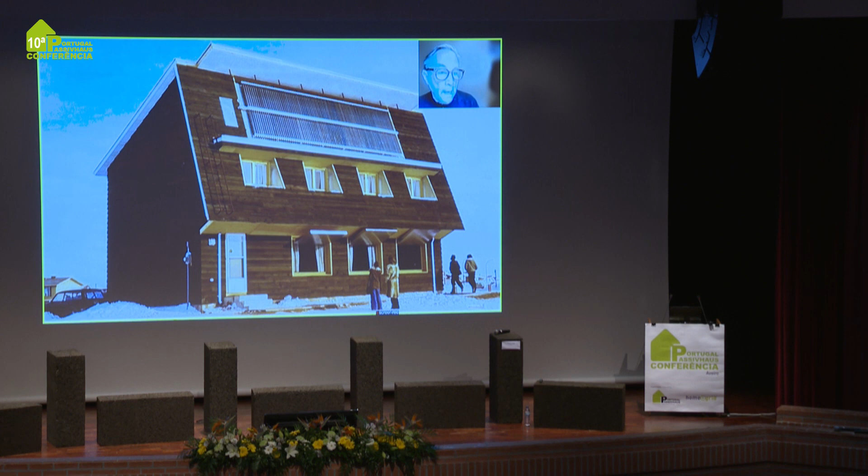This was an era when we were first thinking about super insulation, and this house in Saskatchewan in 1974 became an inspiration for Passivhaus. In some places, it was the beginning of the bicycle revolution. Not in the United States, where they basically started tightening car regulations and car fuel consumption, the beginning of tighter building codes and reducing demand for fuel.

Then supply-sider Ronald Reagan came along, smiled, cut a deal with the Saudis, and everybody started pumping again, and life was fine. Fracking made the energy problem better, but it made the carbon problem worse.

Energy conservation and efficiency became a hard sell when you had all kinds of new sources of gas, from the oil sands to the North Sea to deep sea drilling to Alaska pipelines. It was all about supply. And we kept burning more gas and oil, and the temperature kept rising.

Solving the energy problem didn't do anything for the carbon problem. Global warming was common knowledge and accepted, but everybody was having such a good time burning all that oil and gas and didn't take it very seriously. And of course, it was all very political.

The Paris Agreement, after years of talk, finally set some limits on carbon emissions with a schedule, a carbon budget, and a target, a limit on warming to avoid catastrophe.

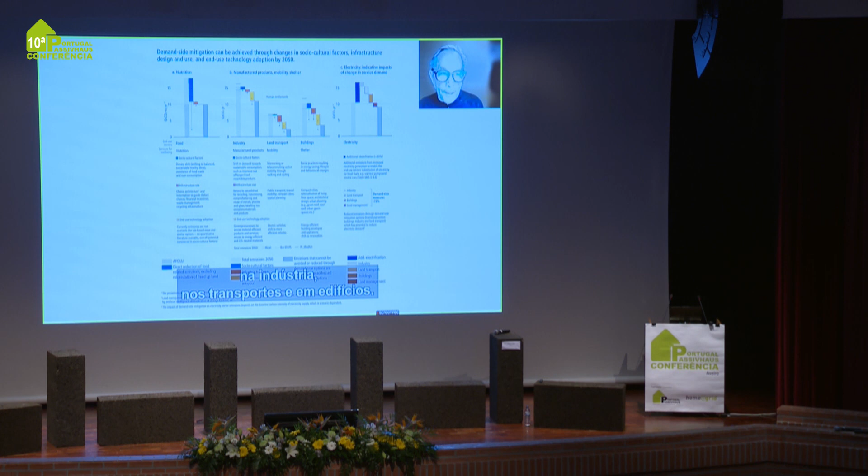They went so far as to say that demand-side mitigation, changes in infrastructure, technology, and behavior could reduce global greenhouse gas emissions by 40 to 70% by 2050. As Amy Westervelt, a journalist, wrote it, the report made one thing abundantly clear: the technologies and the policies necessary to adequately address climate change exist, and the only real obstacles are politics and fossil fuel interests.

So everybody keeps showing these graphs, we have to drop by the graph, these slopes of changes that have to be made. But in fact, it's much simpler than that. There's a ceiling, a budget, a number that they determined through their calculations, with what percentage do we have to stay under a certain temperature.

So from 1850 until now, we've added 2,390 gigatons of CO2, and this is what we have left to stay under 1.5 degrees at a 50% chance: 500. For 2 degrees: 1,350. If we want bigger chances, it's a smaller number.

And here we are again. The last time the tanks were rolling through the desert, now they're rolling through the streets of Ukraine. And we've got a gas crisis. They spent all this money to build this big pipe from Russia to Germany, and then they blew it up.

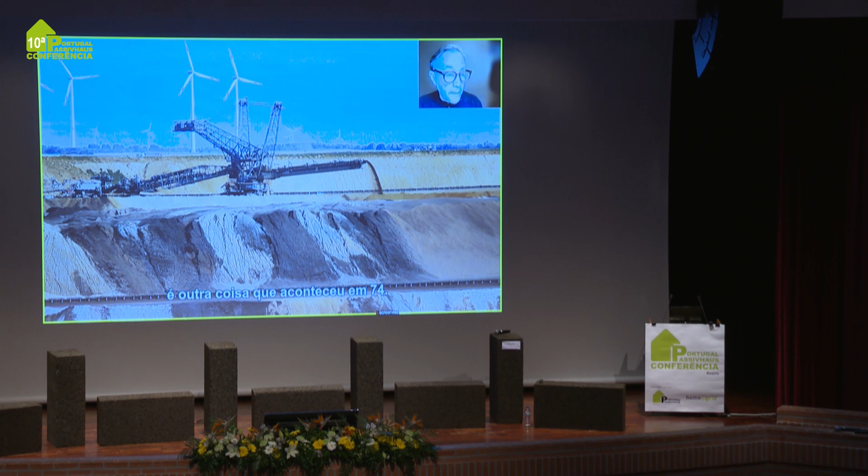Other people think that what will happen is another thing that happened in '74. As Michael Liebreich says, we're going to have the great clean energy acceleration. From now on, all three elements of the energy trilemma, security, affordability, and sustainability, are pushing in the same direction. The great energy price spike is going to give way to the great clean energy acceleration.

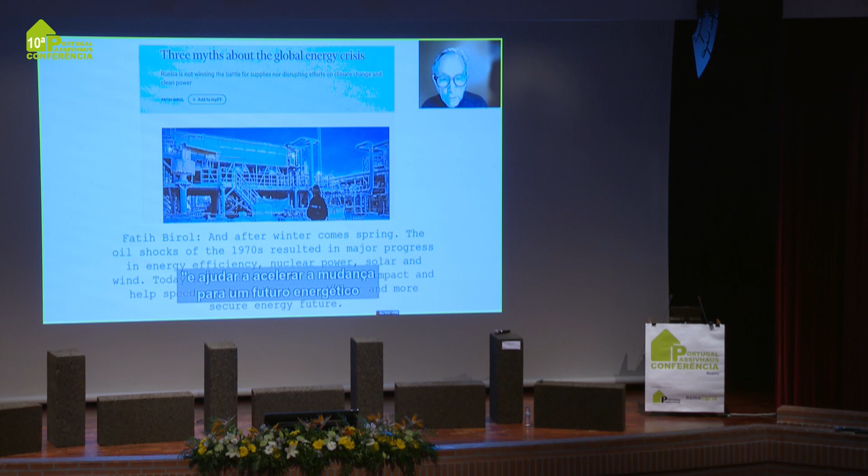Fatih Birol, the head of the International Energy Agency, says the same thing: after winter comes spring. The oil shocks of the 1970s resulted in major progress in energy efficiency, nuclear power, solar, and wind. Today's crisis can have a similar impact and help speed up the shift to a cleaner and more secure energy future. And energy efficiency is, of course, the key point in the Passivhaus concept that we're all here about.

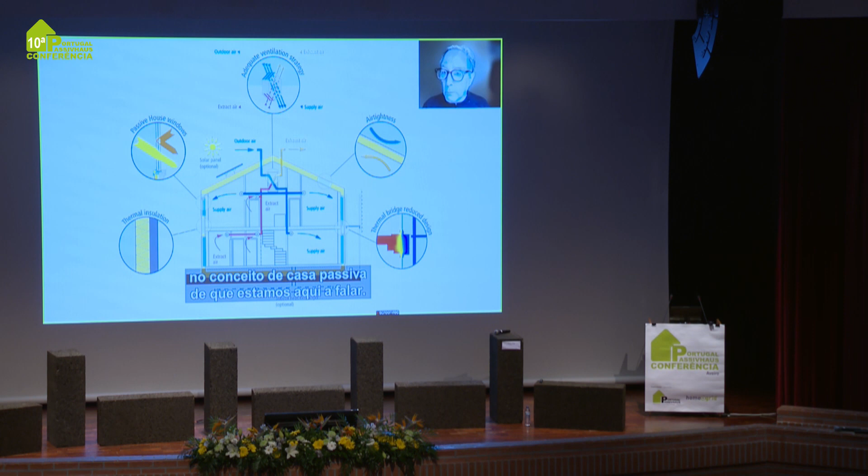And the Passivhaus people make it very clear: energy efficiency is the first renewable energy.

So suddenly, we've got an issue of possible gas shortages in Britain and possible electricity power cuts and rationing. But people who live in Passivhaus don't have to worry about this very much because their houses act like a thermal battery. So as you can see here, when it's really cold, the temperature inside stays pretty constant for days and days and days.

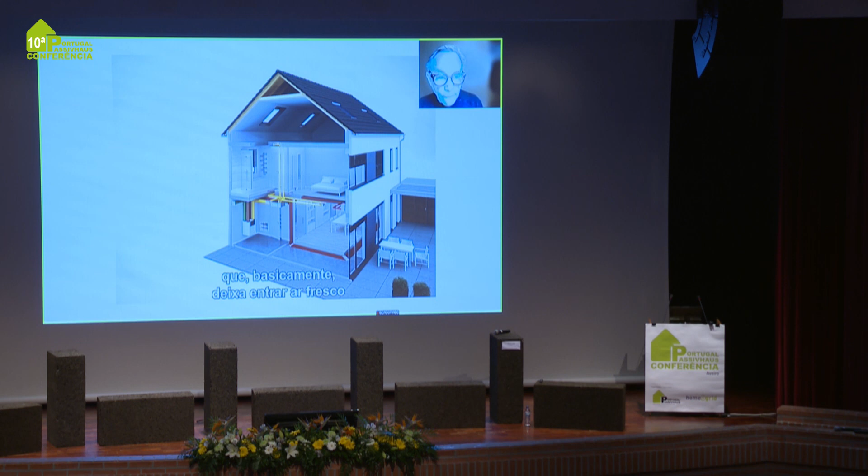And in California in 2014, going the other direction where the temperature was getting up to 30, 32 degrees Celsius, the temperature inside stayed cooler. They also have that filtered ventilation system that basically brings in fresh air and doesn't recirculate air. And this is very good, as they found in California during fires.

When you have smoke and PM 2.5 in quantities, it can basically be filtered out. And that's why they're talking about Passivhaus being a good way to deal with wildfire smoke and indoor air quality. Even for COVID, this is really helpful. You don't want to recirculate air.

We've never really talked about air the way we do about water, but a doctor in Toronto has this great phrase, air is the new poop, meaning we have to start thinking about air, designing for air, engineering for air the way we do with water, and have been doing with water for 100 years. So we know Passivhaus will give you a healthy environment, enhanced control, wellness, elimination of toxins, energy efficiency, and resilience.

However, a very important consideration, and the key of this presentation, is that energy efficiency is not enough. Yamina Saheb is an energy analyst and lead author of the IPCC report I was quoting earlier, who put together what she calls the SER framework, for sufficiency, efficiency, and renewables. She writes that the collective failure in significantly curbing emissions from buildings raises questions about whether the present approach to climate change mitigation policies is adequate and effective. Efficiency improvements combined with the slow adoption of renewable energy and minor behavioral changes are insufficient to deliver.

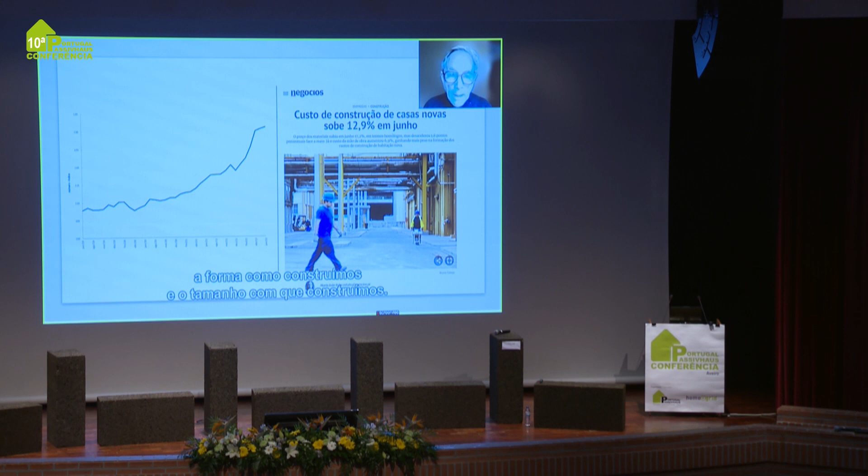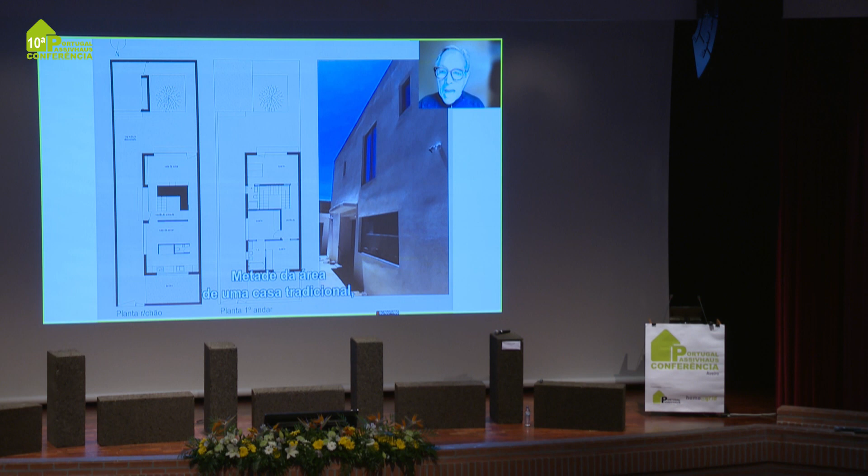I was so impressed when I was last here with Marcio Calera's house, a great example of how you build simple and small and passive house. I keep looking at this plan. It's 107 square meters, and yet every North American house has to have 3 bedrooms and 2 baths and a powder room, and this even has what I love, which is a separate kitchen, all in barely 1,100 square feet, 107 square meters. Half the area of a traditional house with everything you want in it.

This was the slide I ended with when I presented last year, which was that every action matters, every bit of warming matters, every year matters, every choice matters, but I had added the line, upfront carbon matters. Now I want to talk about why this issue is so important for architecture. Architecture, yes, but for everything.

Most people have heard the term embedded or embodied carbon. It used to be called embodied energy, and that made some sense because the energy went into making something. But when we started worrying about carbon instead of energy, embodied carbon made no sense because it's in the air, not embodied in the device. Elrond Burrell, who's also spoken here, he and I had this debate, and he called it the carbon burp, the carbon vomit, the carbon spike. But it's emitted, so we have to find a better name.

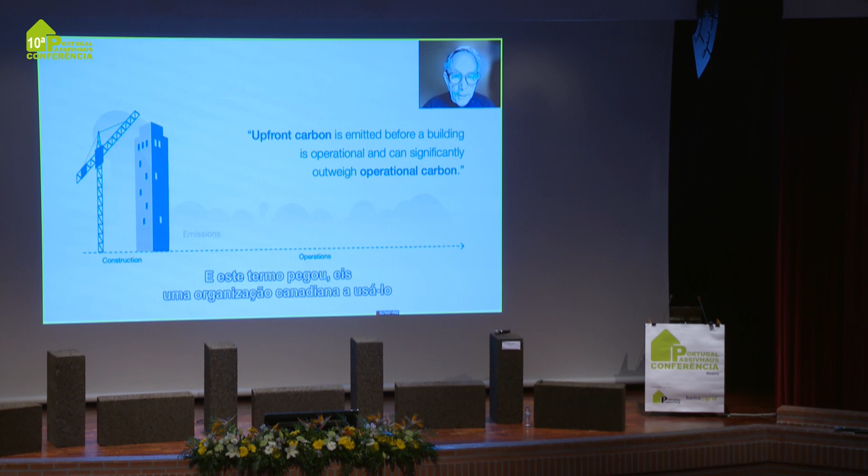I suggested, after some discussion, let's call it upfront carbon emissions. This is a term that's caught on. This is a Canadian organization that is using it, and this is a British organization, the World Green Building Council, which wrote a paper a couple of years ago saying bringing carbon up front. Carbon Up Front is the name of my next book coming out next year, where I'm discussing it, and what you're getting here is a preview of that book.

So upfront carbon, as I call it, they got more sophisticated about it, and they consider it one portion of the full embodied carbon. You see all the stages here, that upfront carbon is the product stage, the raw materials, transport, manufacturing, and the construction.

Nobody used to care about embodied carbon, or embodied energy as it's called here, because electricity was coming from coal, it was dirty and put out carbon, buildings weren't that well insulated, and back in 1996 you can see in this drawing that basically the operating carbon overwhelms the initial embodied energy almost immediately, in a couple of years. John Straube, one of the best engineers about this, wrote back in 2010 that the ongoing consumption of energy to operate, condition, and light a building is the largest single source of environmental damage. Studies show that energy used in operation and maintenance dwarfs the so-called embodied energy of the materials, saying that 83 to 94% of the 50-year life cycle was operating.

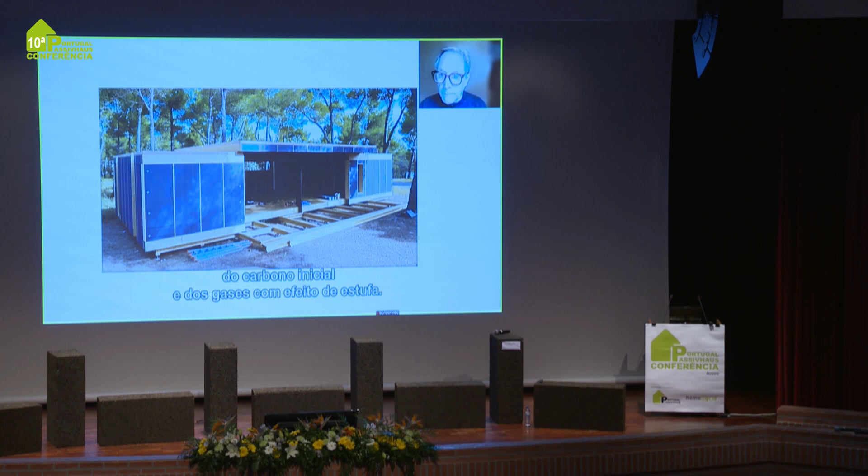Now people are. This was a big study done by Architects Climate Action Network in the UK that looks at what happens when codes start getting tightened. Right now a building, an office building, might be 55% operating carbon and 45% embodied. But if you take the same thing in 10 years, with the projected cleaning up of the grid to be more renewable energy, the electrification, and better insulation, suddenly it's 95% embodied. They included replacement, maintenance, and end of life in embodied carbon, but it still was bigger than the operational carbon. And the grid is getting cleaner all the time.

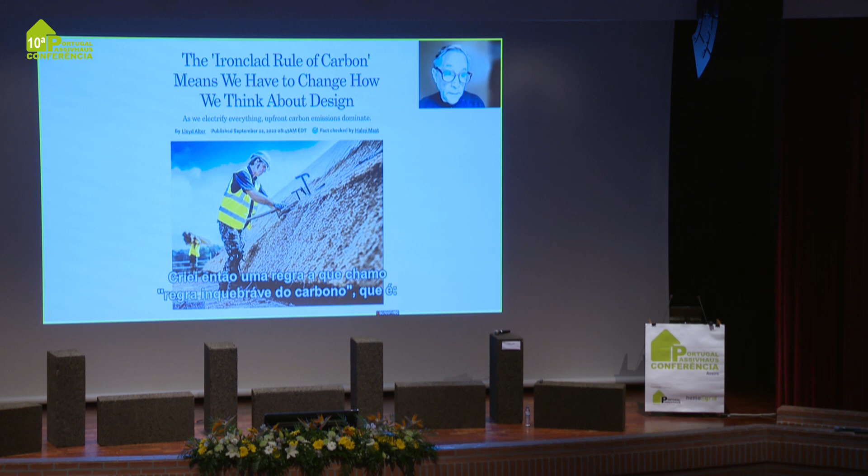Forgive my terrible sketching here, but I did my own graph looking at what happens as the grid gets cleaner. Where I live, for instance, the grid is 94% clean, hydro and nuclear, so it basically never gets above the upfront carbon. If you've got a heat pump system running on clean electricity, it's basically all embodied carbon, or as I call it, upfront carbon. So I came up with what I call the ironclad rule of carbon, which is: as our buildings become more efficient and we decarbonize the electrical supply, emissions from upfront or embodied carbon will increasingly dominate and will approach 100% of emissions.

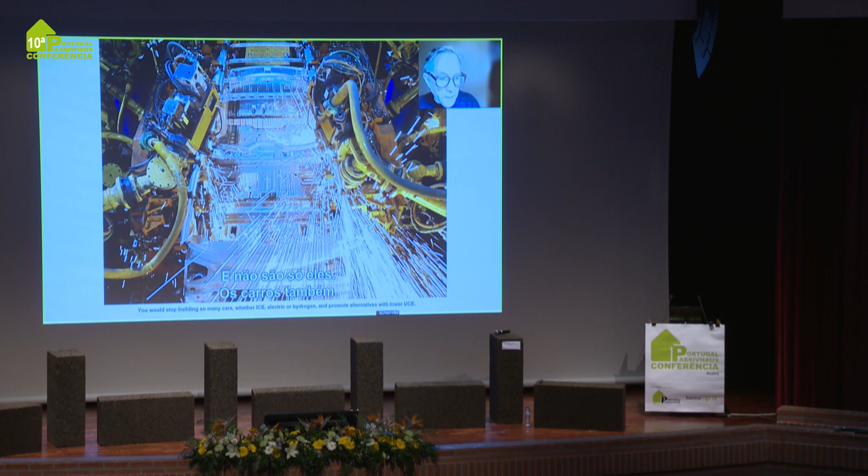So remember what this is saying, that your buildings are basically all embodied or upfront carbon. And it's not just buildings, it's also cars. When everybody thinks they're going to buy all these electric vehicles and build all these electric Fords, everybody forgets about the upfront carbon.

There was this great poster which Hyundai put up: why shouldn't a car have the same emissions as a bike? And the graffiti from someone who knows their energy said, because of the carbon embodied in the materials. When I did the math on this, I found that the electric Ford pickup truck at the time was going to have a bigger carbon footprint than a small European gas car. Everybody's sitting there now saying electric cars are so wonderful, we're going to invest in electric cars, but not when you start thinking about what it takes to build them.

The carbon footprint might be so high that it's off the scale compared to even a little gasoline car. Here it says 180,000 kilometers until it takes over. This was done by another group that came to basically the same conclusion, that these pickup trucks are just too big and that electrification doesn't solve the problem.

I said this last year. I was doing this when I was doing my book, that I have every Apple toy that Apple makes, and they all add up. If you look at this, I showed this drawing last year: look at my iPhone 11, it's got an 80 kilogram carbon footprint. But when you look at the small print, you find they say 83% of it is production and only 13% of it is the use.

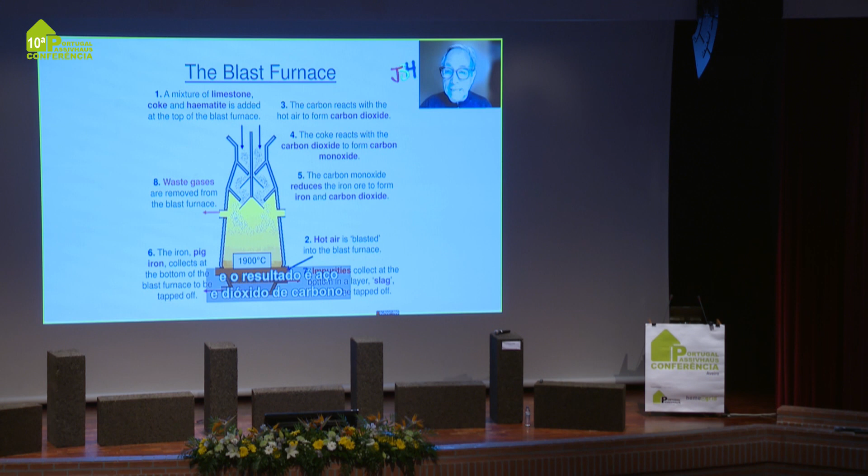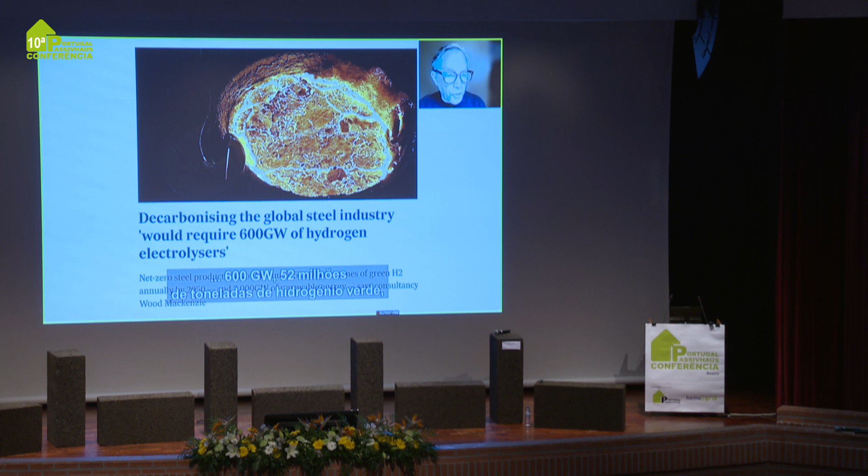We have to think about the materials we build with and where the energy comes from. In cement, it's almost all coal. Iron and steel is almost all coal. Aluminum is almost all electricity. This is chemistry—a real problem. The way you make steel is you throw carbon into the iron oxide, the hematite, and the carbon reacts with the oxygen, leaving steel and carbon dioxide. New technology can use hydrogen instead of carbon, giving water instead of CO2, but to decarbonize the whole global steel industry would require 600 gigawatts and 52 million tons of green hydrogen, which doesn't possibly exist.

It's the same with cement. It's a chemistry problem—to turn limestone into cement, carbon dioxide is the byproduct. 50% of its footprint comes from the chemical reaction.

Aluminum—everybody loves the idea because it's totally recyclable. But 26% of aluminum goes into construction, and 26% goes into these stupid pickup trucks, and everybody thinks it's all so green and wonderful. This building was on Dezeen last week, entirely made out of aluminum—isn't this great because it's recyclable? But there isn't enough. The use of aluminum grows all the time. It doesn't all get picked up. A lot goes to the dump. So we have to start thinking about what we do.

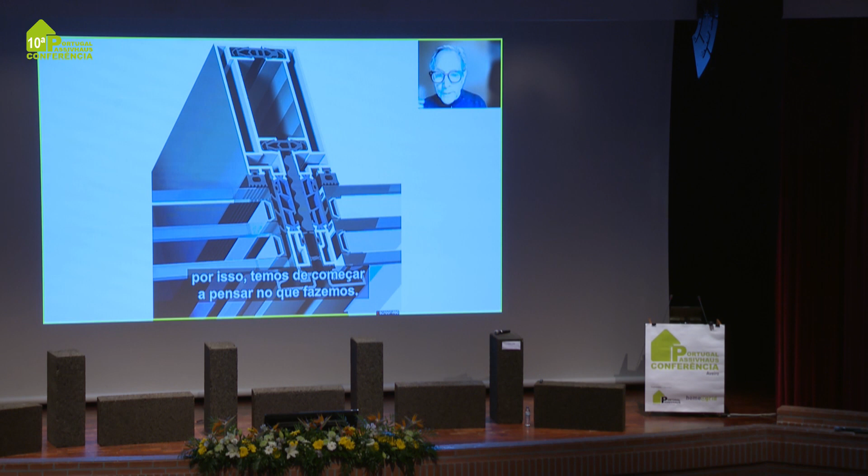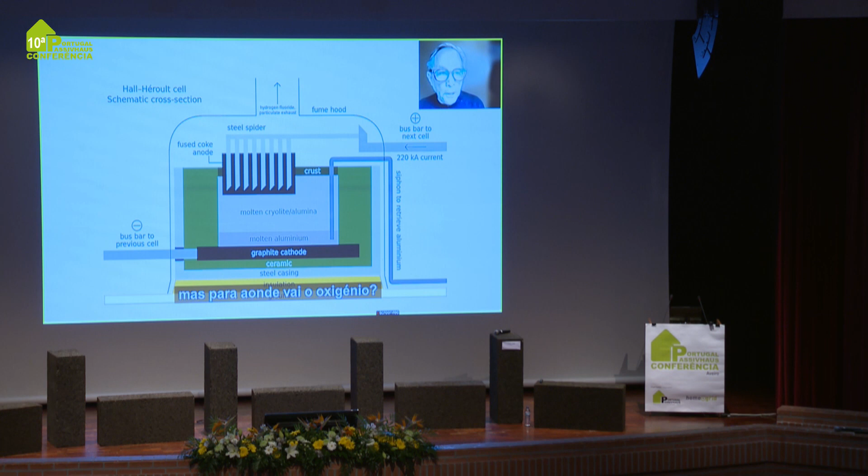Again, this is the same thing—it's chemistry. Aluminum oxide, alumina—you put a lot of electricity into it, and that breaks the bond, releasing the oxygen from the aluminum. But where does the oxygen go? It combines with carbon and comes off as carbon dioxide.

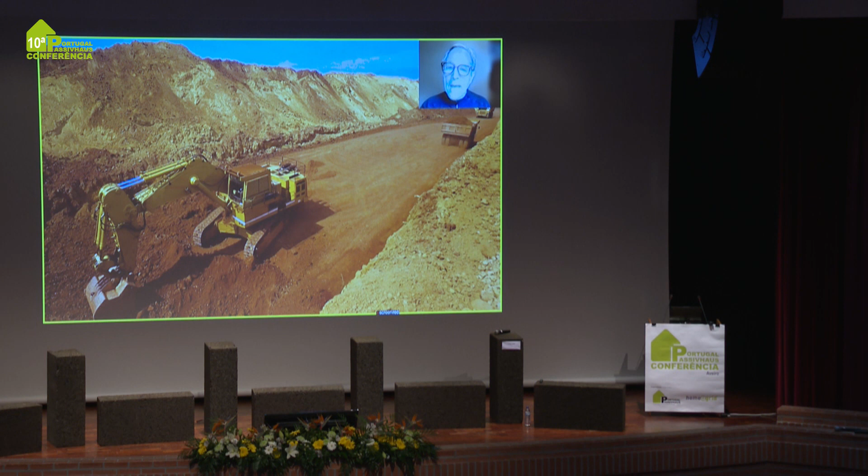Justin Trudeau took money from Tim Cook of Apple, and everybody's investing in Elysis aluminum, which uses a different kind of anode so it isn't a carbon dioxide reaction. This is also being done in Russia—the biggest source of green aluminum—and guess what? The war is messing that up completely, as they're talking about banning Russian aluminum, which is the greenest aluminum we have. Even green aluminum is a huge problem because of bauxite mining—it's destructive and terrible, leaving behind lakes of red mud after they take out the aluminum.

So what do we do? Well, there's the issue of using more wood. But we know that's problematic given the forests we have. How much wood can we actually get? How fast does it grow back? And we're still building stupid buildings, even with wood, because people like looking up and seeing the wood.

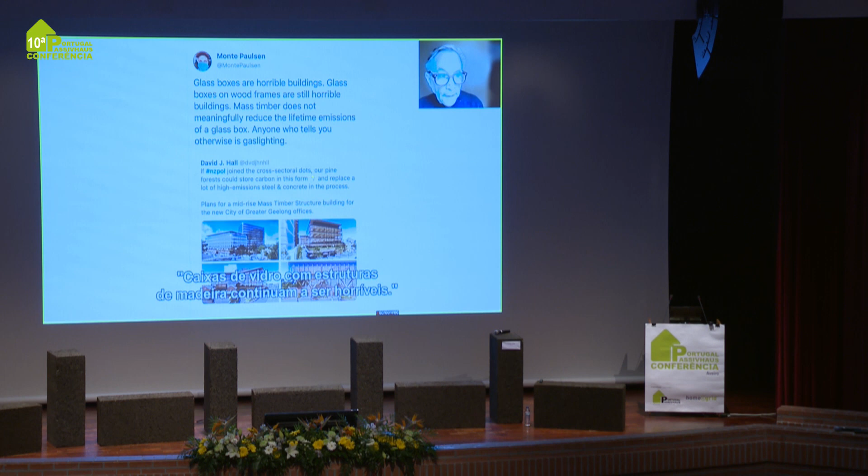As Monte Paulsen, Passive House expert, says, glass boxes are horrible buildings. Glass boxes with wood frames are still horrible buildings. Wood frame buildings on massive parking garages, on these carbon icebergs below our buildings, are horrible buildings. People just don't really get this whole picture.

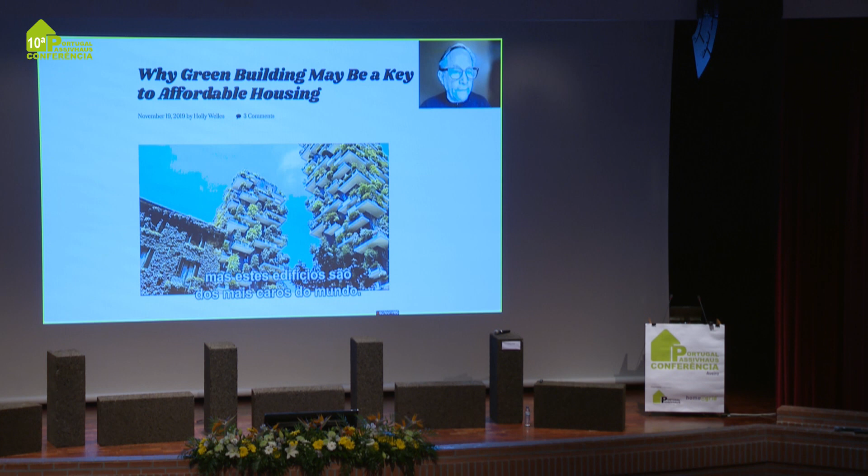Here's something I was pitched on from Valcucine Kitchens. They put one into the wonderful Stefano Boeri buildings, which everybody uses as their poster child for the greenest buildings in the world. Valcucine is saying they're the greenest kitchens—so, why green building may be affordable. They even show this for some of the most expensive housing in the world, these buildings.

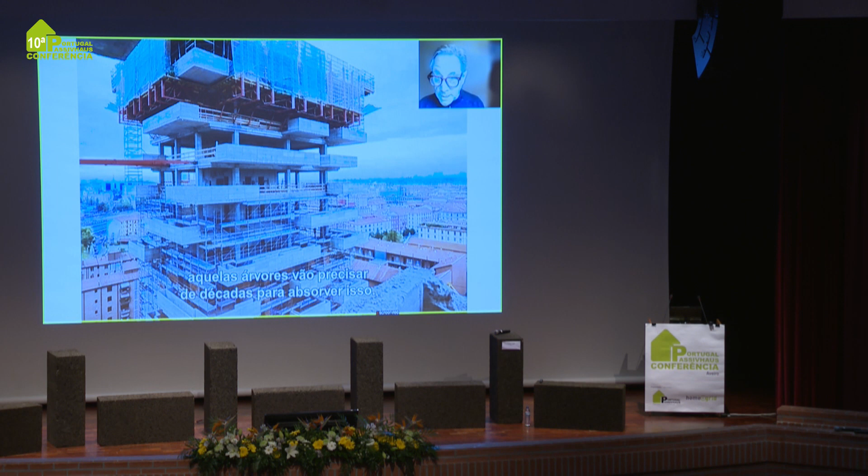The concrete footprint to hold up those trees—the upfront carbon that goes into making this building—will take decades for those trees to suck up. And the Valcucine kitchen is made of glass. So when you think of these things in terms of upfront carbon, a glass kitchen instead of, say, a wood kitchen, in a building that's got like 50% more carbon than it otherwise had—none of this is green, none of this is sustainable. We have to rethink the way we think about this.